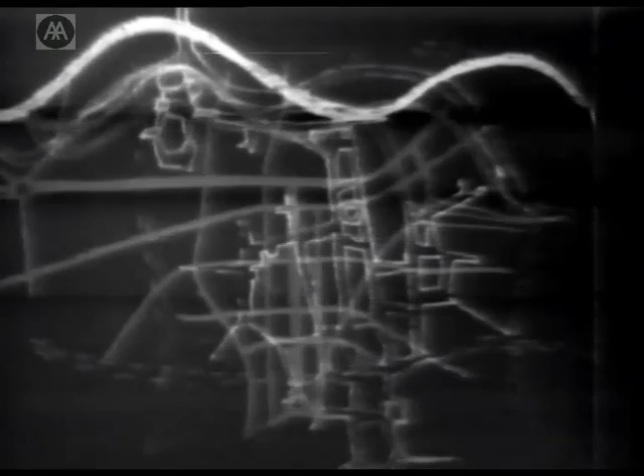In the main shopping zone there are 2 interrelated systems of movement. The various urban forms have 2 interrelated aesthetics. The pedestrian motorist shopper begins by using the street net at ground level, a street net largely as given by the Berlin engineers. The public transport pedestrian starts at the platform net at the 10-meter level, walking on top of the shops.

The aesthetic of the cars is of low-speed straight streets with light-controlled right-angular intersections, and that of the pedestrians free-moving, non-parallel, narrowing and widening routes and angled junctions. The pedestrian upper-level platform net crosses the street net once between every street intersection, and at this point the 2 systems are connected by escalators.

This escalator system makes for the practicality of the 10 meters above ground level of the platform net, for no one will use a flyover or a subway to cross a road if it involves extra effort. The way the shopping urban form works for the motorist would be that for casual parking, less than half an hour, places are provided in front of the buildings between small trees, and more or less give the character of the Champs-Élysées, allowing slow-speed window shopping on both wheels and on foot.

But the motorist shopper who wants to buy, which is a different thing from shopping, must go to one of the underground parking garages located on the main through streets, the Kanonierstrasse running north-south, the Leipziger Strasse and the Kochstrasse running east-west.

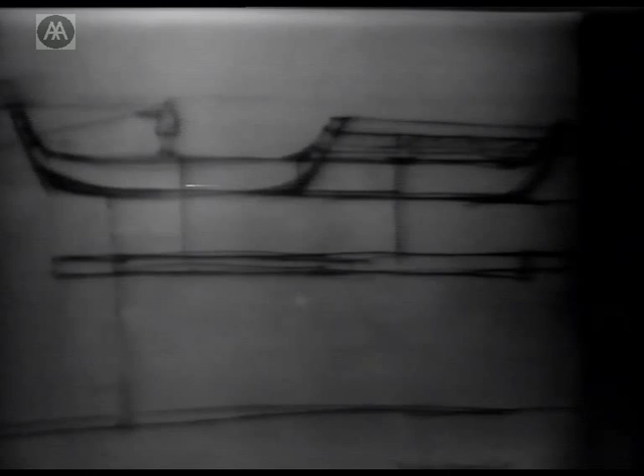And at the bottom, at the southernmost point of the triangle, the foot of the Friedrichstrasse, the platform net terminates the old Mehringplatz with a helicopter station with all its attendant facilities. Except in these special areas, the usual use of the whole triangle is commercial: shops, restaurants, cinemas, with gaps through from one enclosure to another. And although the platform is shown as being 3 floors high, this is nominal. For most big shops would tend to have only one high floor and perhaps a basement for servicing.

The urban forms of Hauptstadt Berlin had as their basis the idea of absolute maximum mobility, achieved by a layered movement pattern separating the various means of movement. In this case, it's difficult to pull apart the urban forms and the urban structure. Each urban form uses for its support a specific quantitative-qualitative combination of the means of movement, which is the urban structure.

These variations give to each part of the city its identifying texture. Speaking of use, attempting to make the city legible through the order of movement and the concomitant urban forms. The individual can experience a new freedom through using the means of movement. When the machine is sweetly used, it allows, and so engenders, consideration for others. Freedom by the removal of conditions that cause stress, an improvement of the air breathed as we move through our cities.

The platform level, the upper level, is kept in full pedestrian use by putting various things up there, some accessible only at this level, so that the platform becomes their terrassen, an external extension of their business. Other larger businesses are accessible from both the ground and the platform level.

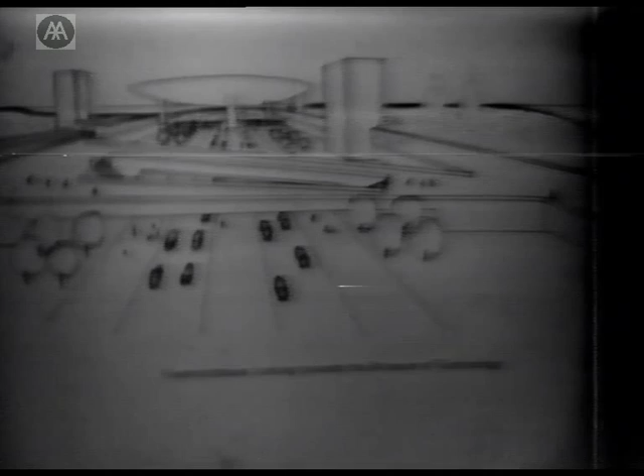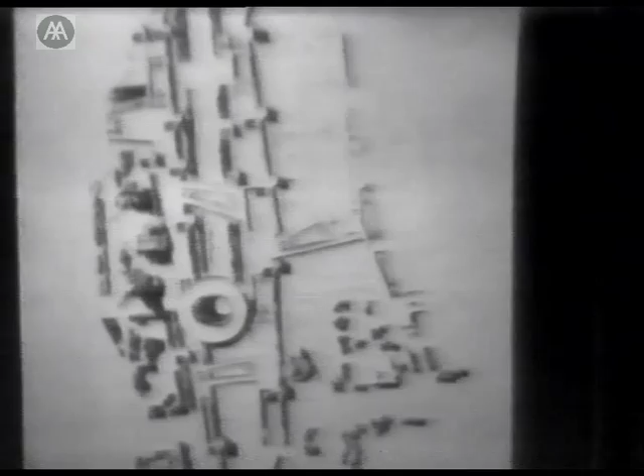The feeling for change, the need for elbow room, for opening up so that buildings, roads and services can each develop freely according to their own law, and have the possibility of change without compromising the development as a whole, is central to the thinking behind the urban structure and the urban forms of Hauptstadt.

At its periphery, this low-level platform sends out connections, 3 major and a number of minor, to join up with the Anhalter Bahnhof on the southwest and to the Old City on the northeast, and more importantly to the northwest it sends out a major branch to the government building. The minor branches connect through the wall of offices to the Tiergarten as well as to the new green zones and to the surrounding city areas.

The major connective branch on the platform which runs out to the government buildings is a processional approach to a great forum created around the Platz der Republik in the bend of the river. Here the platform widens out to hold terraced government buildings and encloses the old circular Platz at its southern grasp, finally rising in a series of tiers like the fingers of a grasping hand to form an amphitheatre.

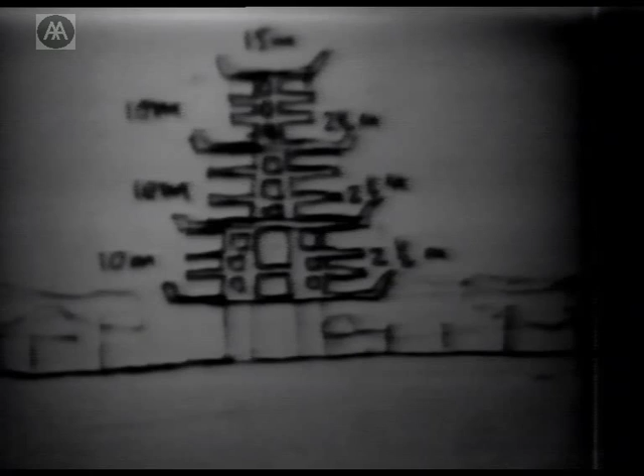The approach to the Platz der Republik is under these tiers, and under the government buildings are the car parks and service areas. Officials and their visitors can look down from the terracing of the government buildings into the amphitheatre on national occasions. At the junction between the processional approach platform and the Parliament Forum is the press building, with its antennae and television masts. Under the approach platform runs the road connecting the Parliament to the rest of the city.

Throughout our work, before and after Hauptstadt, we've thought about the plan which could present a non-rigid idea, a way of indicating by means of drawings a direction an urban form could take, open-ended drawings that are suggestive of possibilities that might accrue or become obvious only when the first portion has been built.

Such a notion is that of the ministries. These buildings grow to their rear, stepping up behind the 2-story ministers' houses on the riverbank, so as the ministers' departments increase in size and become more anonymous, so does the building that contains them. They rise to a maximum of 45 metres and at the highest part touch the peripheral road from which the vehicular access is gained. The ministers and the high officials use the formal entries and parking spaces off a continuous quay on the north bank of the Spree from the Bellevue Schloss to opposite the Dom.

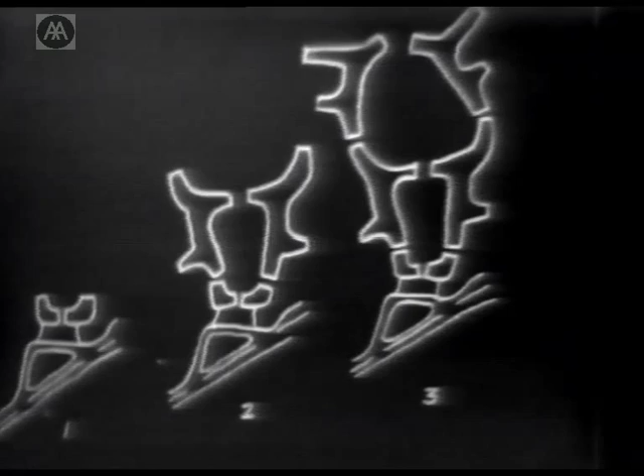This is, therefore, a general notion, a small thing attached to a pleasant place, and a bigger and bigger and more anonymous, more protected place attached to the noisy places, one thing growing into the other. The ministries, set out in their green zone, define the northern boundary of the Berlin Hauptstadt.

There is, in a similar general way, a wall of offices rising to a height of 100 metres defining the shopping area. The wall is formed and located to minimise the shadow cast by its height. In that part of the green zone outside the wall of offices there is car parking for office workers and day shoppers and service areas, all hidden behind grass bunds and planted with trees. The green zone outside the wall of offices is intended as recreation gardens for office workers.

The boundary theme continued around the city, around the original city, by an office wall which in the original city area becomes warehouses with service areas, loading bays and so on the back side. The shadows cast by all these buildings fall mostly onto roads or onto the S-Bahn.

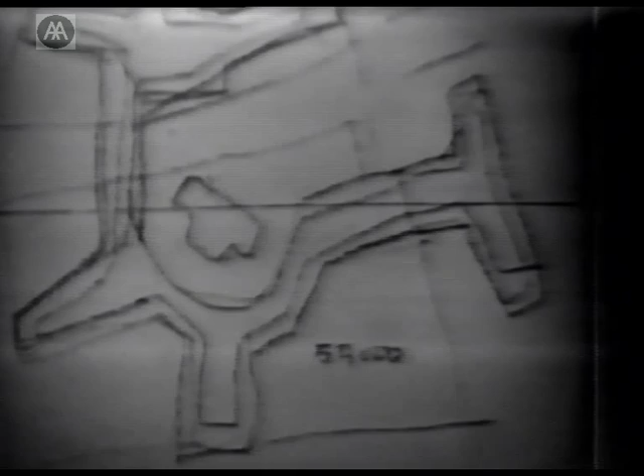The original city nucleus has been consolidated by weaving between the existing buildings 3 new civic buildings. Most of the curved streets are retained in some form, and the area between these streets and the buildings is paved for short stay parking and for pedestrian access, as we did along the Friedrichstrasse. The new buildings are terraced and form well-lit dished spaces, their general aesthetic tying up with that of the government buildings.

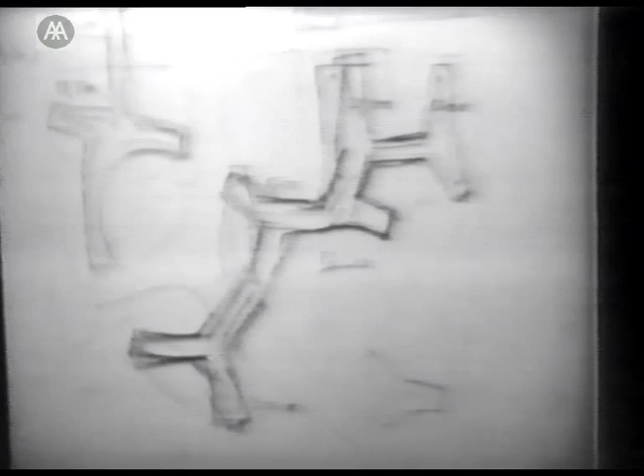The other area, the area of Berlin's first settlement on the Fischerbruck, where many old houses remain, is preserved as the Berlin equivalent of a Kasbah. Everything which remains is to be preserved as far as possible, and between the preserved buildings are new buildings arranged around courtyards, much as Ulm Cathedral Square. The whole quarter is treated rather romantically with a mixture of academies, pensions, tourist facilities and private houses.

When we came to visit Berlin after Hauptstadt, it was obvious that Berlin had what every other city in the world might envy, an open centre. Scharoun's answer to the same Hauptstadt competition had, with understanding, increasing meaning and value.

In all other metropolitan cities, development pressures have brought about, or in the Arab countries are bringing about, a condition of overbuilding. They are all cities kept going by a vast deployment of mechanical devices, underground railways, lifts, escalators, a layering of activities one above the others, apartments, shops, services, parking, sustained by an equally vast deployment of air conditioning, ventilating equipment, pipework. For the ordinary user, enjoyment of the city tends to get squeezed out in the layers.

Certainly the metropolitan cities have lost that sense of structuring and feeling for use which we associate with ordinary villages and towns. Space Berlin had. At that date, 1958, the open texture left by the destruction of the war could have been used positively, as Scharoun suggested, to allow building towards a new, expansive image of the metropolitan city.

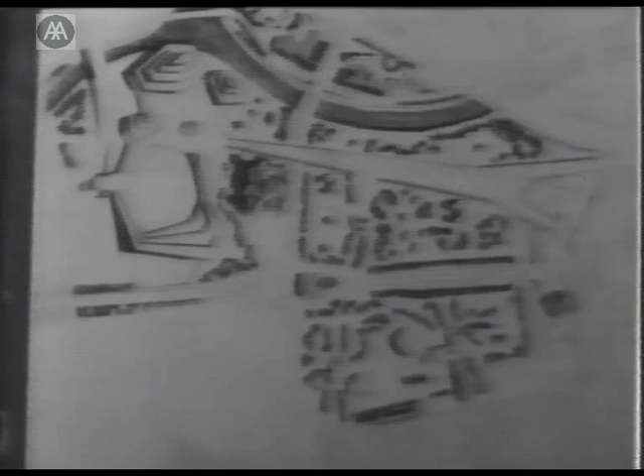Berlin, as it has in fact been rebuilt, is by the spotting down of buildings like single teeth in gaping mouths of city blocks. With Scharoun in the city, a policy should have been adopted of grouping buildings into substantial clumps around which servant facilities clustered.

A city within a greater Tiergarten, flowing into the surrounding lakes and pine woods. The new image could have been worthy of its enforced role as a Sleeping Beauty island, a romantic place, worthy of West Germany having its heart there.

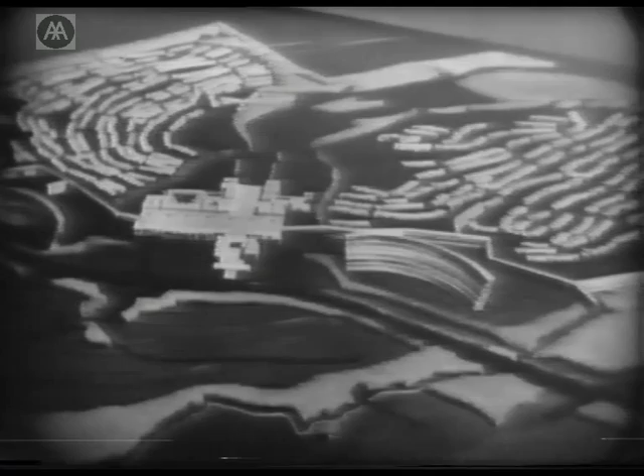In the Hamburg Steilshoop, we again take up the same themes as in Hauptstadt Berlin. Mobility, inverted profile to the centre, urban form elements which would accept growth and change, preservation of the existing green spaces, which in Steilshoop are the allotment gardens. In this Wettbewerb Steilshoop, made in 1961 for the Free and Hanseatic City of Hamburg, our German collaborator was Wolfgang Quante.

The roads in this project form the primary structure. Vehicles enter the site from one takeoff on the Schwarzeweg, the main road. Immediately north of this takeoff is the centre of the new community, the first place passed if entering by car, the first place stepped into as a pedestrian coming out of the U-Bahn, which also crosses on the line of the motorway, very close to the site.

Through traffic passing along the Schwarzeweg on the elevated level over the takeoff, seeing the particular form of the centre of Steilshoop, has some experience of the identity of the community. The two side distributor roads to Steilshoop were on its west and east side. Each road to the north stops short of the Ohlsdorf cemetery, which becomes a literal dead end. On both these distributors, as far north as possible, links are provided to adjacent developments, but not in such a way as to provide easy through routes.

Off these main distributors are loop roads serving the housing areas. A special loop serves the centre. In all cases, it is perfectly clear what is the function of the road. Houses on the ground are related to the low-speed loop roads, the low apartment houses to the medium-speed distributors, and the high apartment houses to the Schwarzeweg. For all the houses on the ground, car parking is sunk 1 metre below the natural ground level. Parking for the high-rise types is related to the vertical access points.

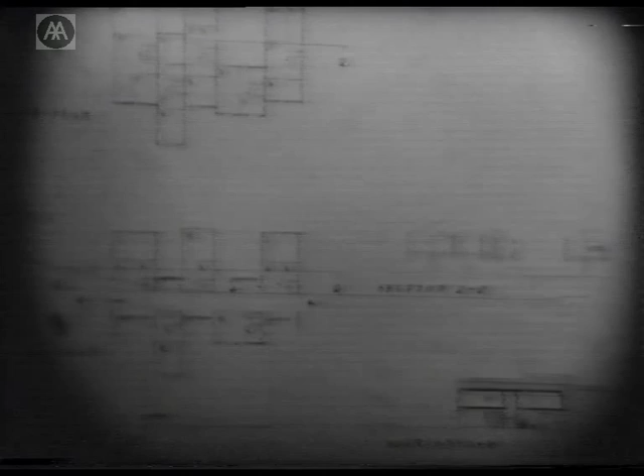Furthermore, the question of housing type has to be seen at the scale of the city as a whole. A mixture that would give variety in a village would produce boredom at the scale of a big city. Here, the same housing type, houses with gardens, extend over a considerable area, the variety being adjustments within the housing type. All are close houses, keyed together to form their own covered pedestrian access route, arranged as if leafy branches on either side of a central green space.

Every alternate green finger extending from the central space between branches is allocated for children's open play space. Pedestrian ways through and between close houses, both covered and in the open, are linked to the complete pedestrian system. No child is to be taken across more than one residential road at the end of the close in order to make its way along the edge of the houses to the primary school and local shops. Linkages for perambulator pushers and bicyclists between branches of close houses take people to the schools and bodying out the centre.

At this point where the schools are, the Bramfelder Lake recreation area has been extended southwards via the central green space from the west end of the lake to the apex of the Steilshoop U-Bahnhof; there is the centre. That is, the lake is brought until it meets the maximum point of intensity by the railway station. The central place forms a social focus of the whole group, combined business, social, educational, community centre, marketplace, and so on, lying across the highest part of the site.

To the south of this place is the Bahnhofplatz, through which one enters the town by rail. To the north, the Schulplatz, which is at a lower level, and then dropping away again, the green wedge to the lake: the lake, the green strip, the schools, the centre, the U-Bahnhof. And it is here, in this central place, where these two systems touch, that the urban experiences at their most intense that are possible in the suburbs are experienced.

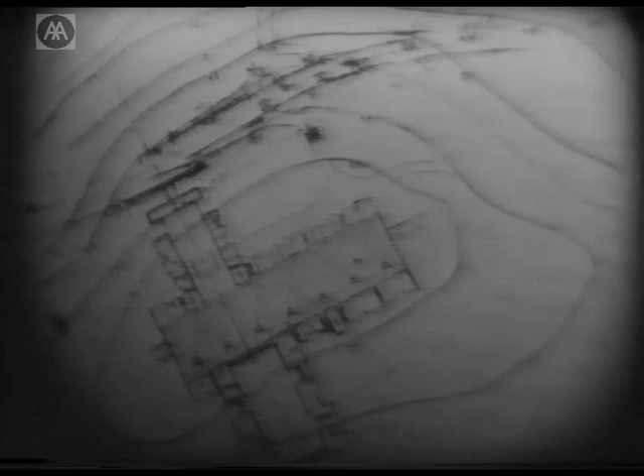By including the schools' hard play areas and the big auditoriums, large definite elements, one can take formal control of the space. And the schools benefit from parking space provided for the shopping, particularly at evening activity time. The cinemas, social buildings also benefit. Use throughout 24 hours justifies parking being covered by the marketplace, the floor of which is concrete and glass, a triangulated mesh, to make the parking itself as light as possible.

Thus the centre's on two levels. Cars and service access under the marketplace; above the marketplace, on the south side, ordinary shops; at the north side, craft industry shops, all German things like furniture repair, shoe repair, and so on. Stores of all buildings, being at natural ground level, screen the parking and service area from pedestrians using the green space.

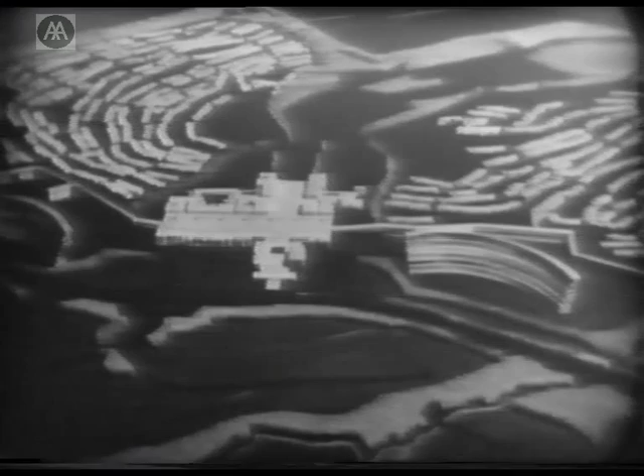This notion of taking the largest built volumes, concentrating them at the centre, is an attempt in this very modest place to give a genuinely different experience from that which is obtained in the housing areas. The interchange, the two rail links into Hamburg which come to this centre, we hope will add periodicity of custom for the shops, and also the fact that there are always people about gives a sense of social control. They're being protected from vandalism, but without having policemen.

At the extremities of the marketplace start the linked systems of access, the access decks of the apartment house type. This is accessed from decks, and there are flats and maisonettes, gardens on the ground, and the access systems branch out to penetrate into other housing areas, spanning the roads, so that the children can get safely to and from the green space and the schools. And the deck houses, which are closest to the marketplace on this system, and therefore closest to the shopping and buses and trains, are intended to be where old people could live.

South of this deck house system, and set well back from the Schwarzweg, rise the curved terraced houses, again apartment houses, very tall. They're with wide terraces, raised private balconies and living rooms facing the sun and looking out to the towers and cranes of old Hamburg. Due to the configuration of the site, two of these terrace houses are on the west side of the centre, and these, together with a chain of deck houses, build up an increased population. And on that side is the third of the primary schools, and also a local shopping centre.

The staging proposals are shown in a diagram, but more importantly, it was suggested in the report that after the second phase the whole thing should be reassessed, because our experience has been that one of the sources of tepidness in new towns and large suburban developments in England has been the fact that people pressed on with the staging of the master plan and didn't take into account that once a physical fact had been established on the ground in the early phases, the natural thing is for the new development to reciprocate with what already exists. So it was the intention that this master plan should necessarily be thrown away after the second stage, and a whole new assessment of the site should take place.

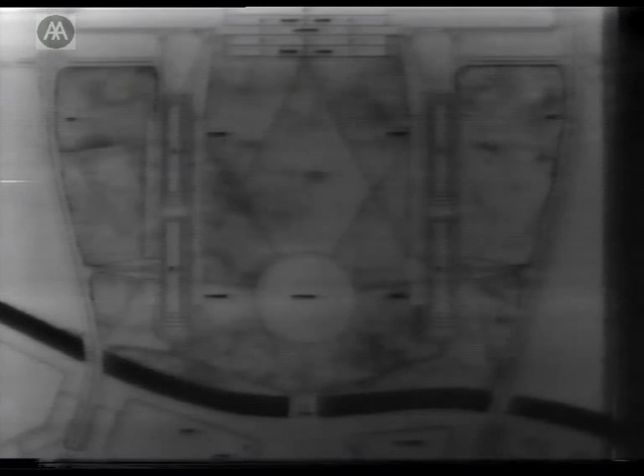This pedestrian system returns to the traditional geometry once it's south of the canal, where we convert the existing streets into pedestrian routes. So the diagonal mesh system is on the new site. We return to the street pattern for pedestrian ways south of the canal. So there are the 2 systems, rather as they were in the Hauptstadt, existing systems and superimposed systems.

These long, low, wide offices, which were the client's requirement for this site, were considered in some detail. On the purely office floors, there was a lot of internal space without natural light for computers and filing and so on, things where you don't live all day. And the perimeter was open offices and closed offices with windows. Everything was considered as air conditioned.

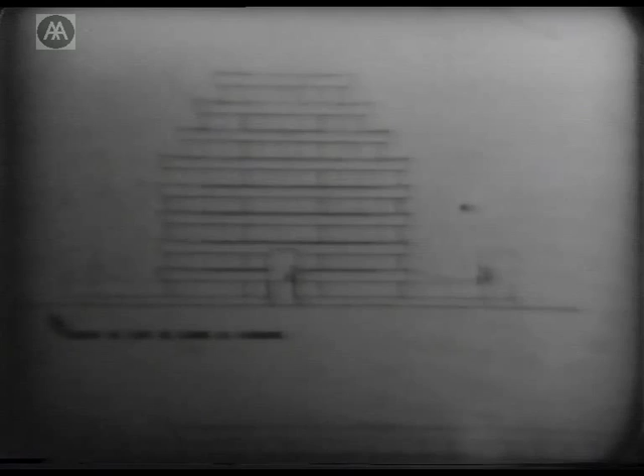But on the upper floor, where the building cuts back and there are terraces, you have opening windows and so on, with sliding doors, natural ventilation. This whole form, the long, low thing, stood on stilts, tall stilts, in a deep, waterless moat. To get to it, you have to cross a bridge over this moat, and the points that you enter are marked by neon-lit porticos.

Having penetrated the portico, you arrive at a continuous gondola suspended under this long building and hanging in the waterless moat. Indeed, as the design recedes in time, one begins to see the whole building in terms of a zeppelin. It is a long, straight building with a gondola hung below it, hovering over this moat.

And in this gondola, we could actually see through Zeppelin-type windows views out to the stilts, through the stilts, into the central green space and down into the busy service area, where there were the porte cocheres for official cars and unloading bays and so on.

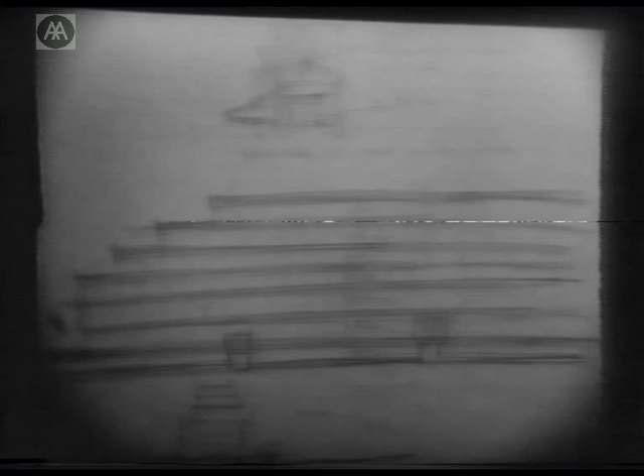But the vehicle movement is reduced to a minimum because the office workers' cars, visitors' cars, are deposited in the parking garage parallel to the motorway or on one of these nodal concentrations of service areas. But because of the geometry, no entrance into the building is ever more than 300 meters from one of these car silos.

It was by eliminating surface traffic, by having these almost invisible buildings, two zeppelins hovering over the moat in a very leafy plain, we hope that once the trees had grown up, the presence of the buildings would be hardly felt at all.

So to sum up, the theme of the three German urban form projects, Berlin Hauptstadt, Hamburg Steilshoop, Berlin Mehringplatz, became in the broadest sense connection. A knitting up of the existing streets in a new pedestrian network as a matrix for a new aesthetic of city in Hauptstadt. Connection of each house to the district centre in Steilshoop. And finally in Mehringplatz, connections of events along the urban motorway.